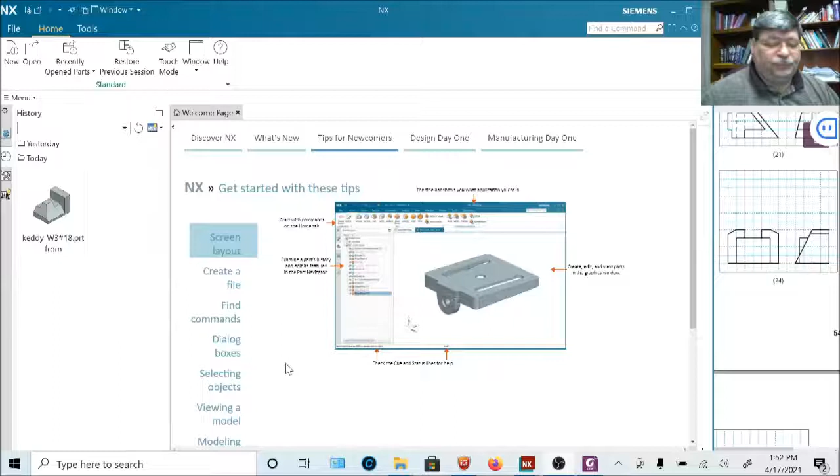Okay, week 3, homework problem number 2.

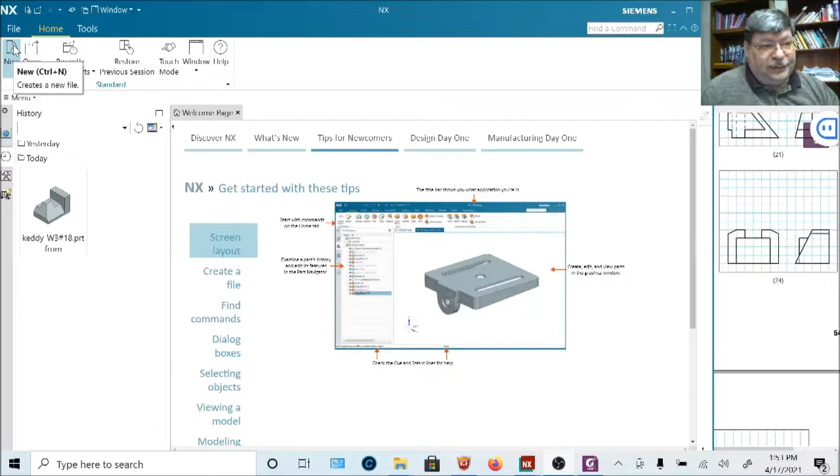Problem number 24. So we're going to go name it. Let's go week 3, number 24. And I'm going to put it under, again, make sure you put it on your U drive. Set this to your U drive.

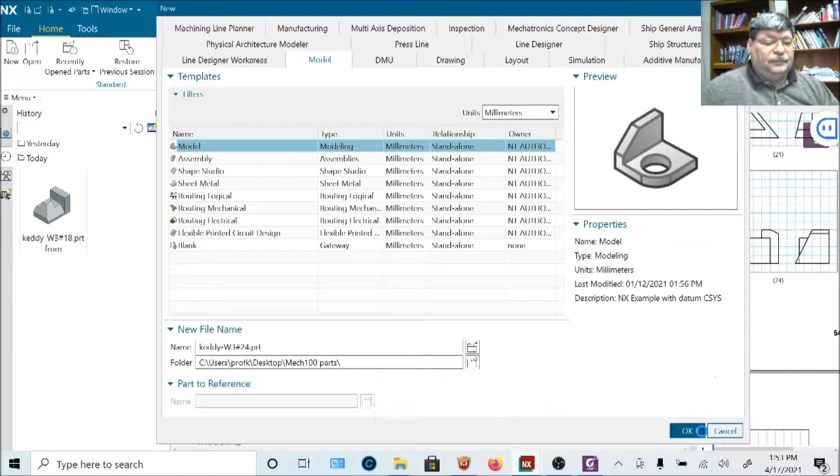Okay, you should have the screen up, and to the right here is the problem. If you're working from homework, you also have a top view if you did it right. You don't need it though, and if the top view is wrong, you certainly don't want to be drawing from that. Okay, you always want to attack this problem.

So think about it first. Look at the part, identify what it looks like. So we have this block. It's 40 wide by, what is that? 10, 20, 35 deep—okay, it doesn't quite come to the front surface here. And it's 40 high.

And then it has these two features. You see this hockey stick here on the left and right side, and those are inclined planes. That's the inclined plane here. And it's all attached—it's all one homogeneous solid.

So what are we going to do first? I mean, we could start with just create a big block that's 60 by 40 high, and then just start cutting corners off it. We can chamfer these top corners off—that's easy enough. We could subtract this front here, and we could do a chamfer on the front here. So instead of doing a whole bunch of subtractions, if we can do chamfers, we want to do that.

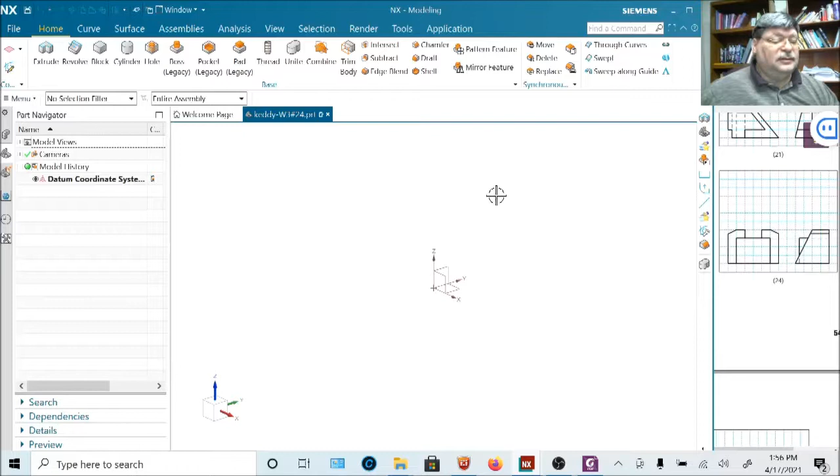So let's do from profile. We're gonna do extrude, we're gonna pick the profile datum plane, so we're on the right side. It rotates it, now we're looking from the right side. So here's my right side view.

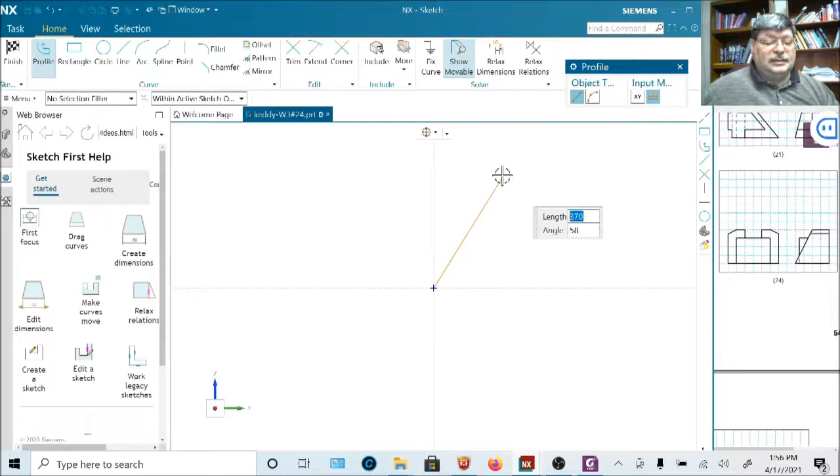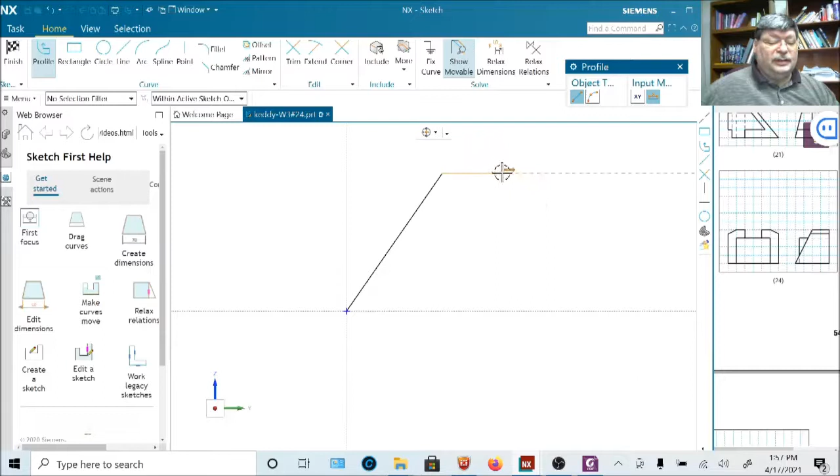I'm going to draw from the front of the object this incline. And let's see, that's going to be a little bit longer than 40 high. Let me zoom in. If I stop for a second, I can see what it's telling me—that's about 30. Okay, so I'm going to draw the first line and zoom in. There we go. And then this top will be about 20, and about 40 down and over there. And escape to get out of that sketching.

Now let's put our dimensions in. Okay, so start here, click to drop it. Double click, 40 deep. There we go, and escape to get out of that dimension. And this is 40. Enter. Up front, double click.

40. If it's highlighted up there, I can just type it in. There we go. And this is... oops, oh, I accidentally rotated it in space.

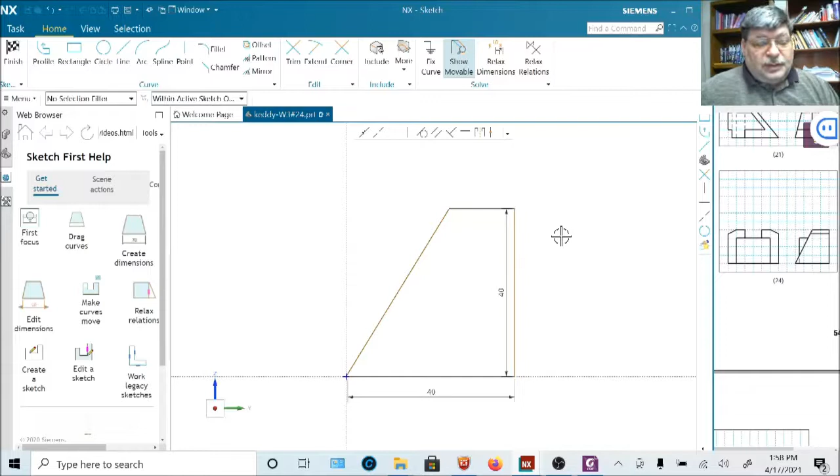Okay, Control 8, Control F8, Control F8. I thought that was supposed to— maybe it's Function F8. Just a second. Function F8. Nope, that's not doing it. Nope, that's bringing up something else. Control F8. Function F8—oh, there goes. Function F8 will bring it back square to the nearest plane that you're facing.

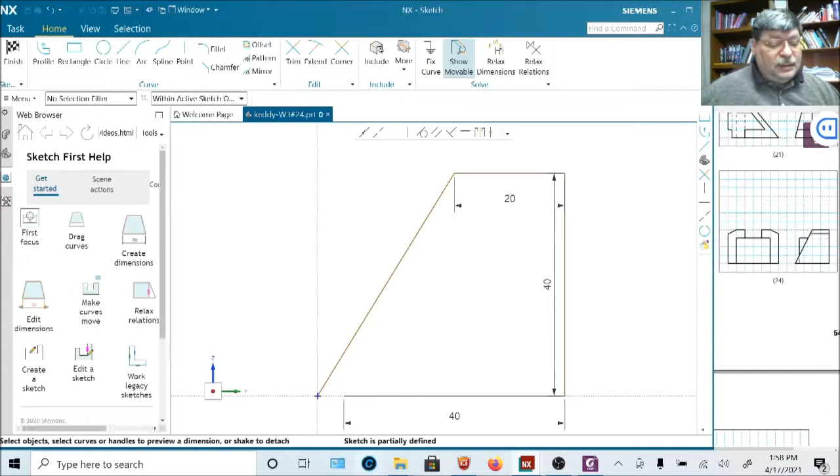Okay, click, double click, 20. And I have to resize my NX sheet again here in just a second. There we go—sketch is partially defined, so I don't have it all quite yet.

Oh, these are not connected. How am I going to connect those? Let's try coincident point—click on this and click on that. Did it bring them together? I believe so, let's say okay. Nope, it did not—nope, it was just a pause, it was thinking. Okay, now it says sketch is fully defined.

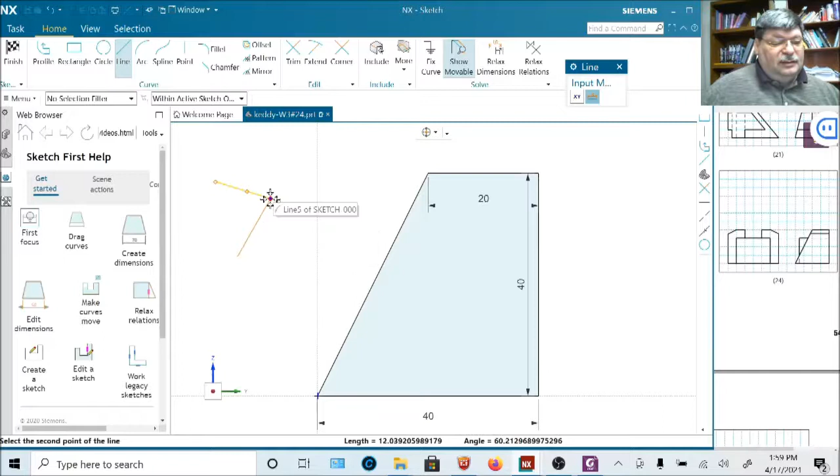Okay, so I missed the endpoint when I came back and I didn't quite click on that endpoint. You got to watch your cursor and watch what's happening to lines. Let me give you an example again: a line here, a line here. I'm going to go to that endpoint, make sure it makes a little red dot there on the end, okay? And not there where it misses it, or here. Okay, so you got to make sure you're on there when you snap.

And let's back that up. Okay, so this is done. Let's finish it.

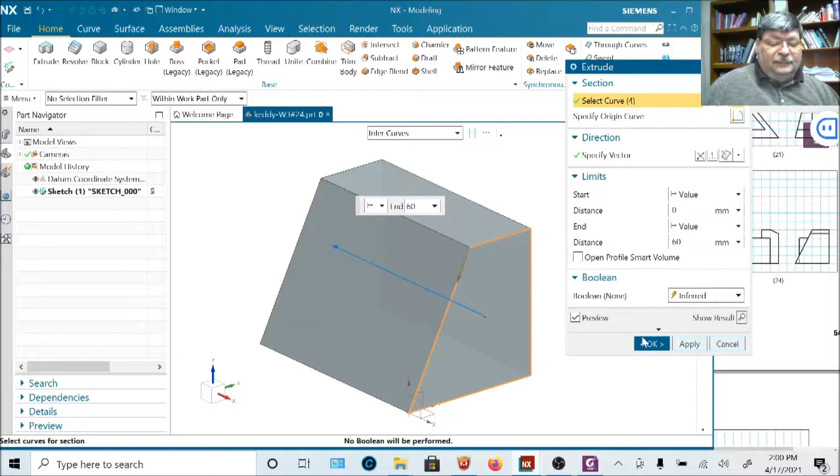Let's zoom in, rollerball. And from that plane, we're going to go to the left, 60. Pan it—mouse button 2 and 3, hold them down for panning. And say OK. Now that's good so far.

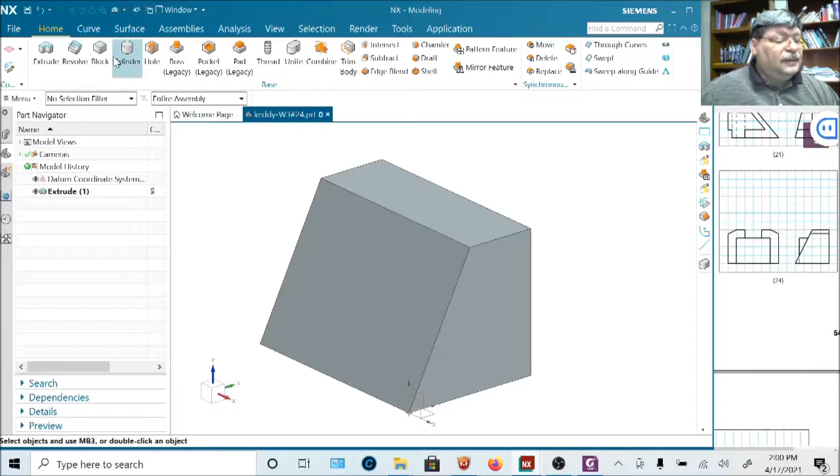We've got to cut this hole through the front, right? We already have the incline cut though. We've got to make this box. Okay, we can do it. Let's do it from the frontal face—let's do the box. Now I'm on the front face, and the box doesn't start until 5 units, 5 millimeters in, but that's okay.

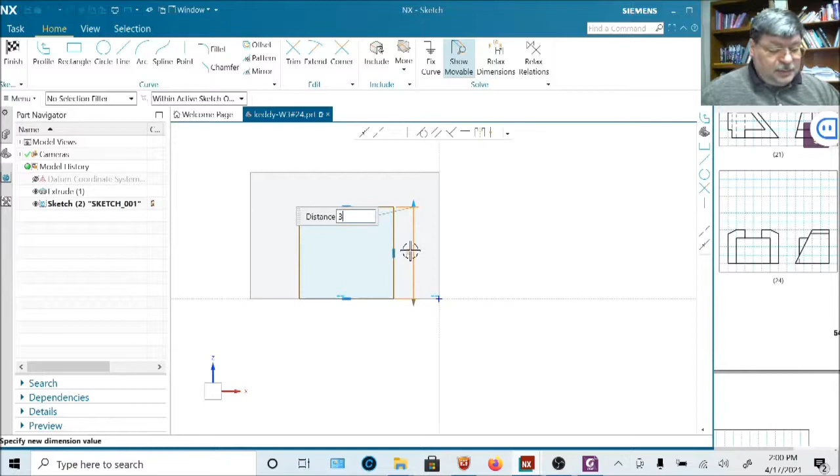Click, drag. Okay, this one is 30. I'm getting used to this new

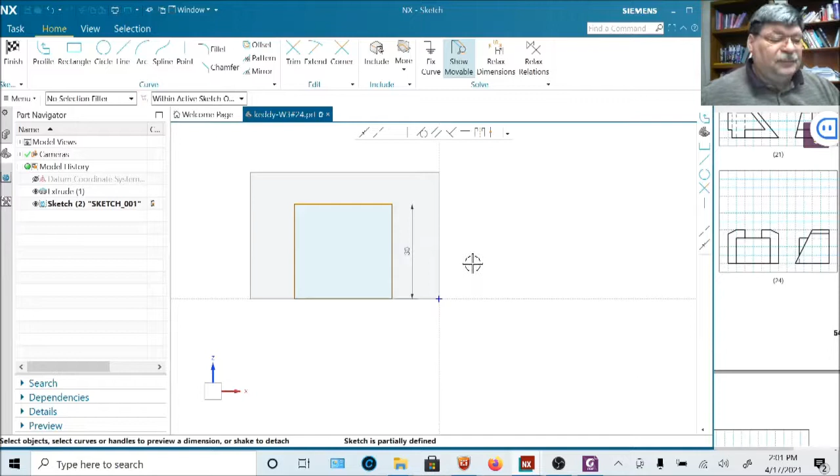Version 13, as I call it. This is actually, what do they call it? They call it a build now. They went from version 11 to 12, but nobody likes to do a version 13, okay? Like they don't build the 13th floor on a high rise. They go from 12 to 14. I don't know what they do with 13. People are superstitious—nobody would rent a 13th floor, okay? So that's why they don't number it 13.

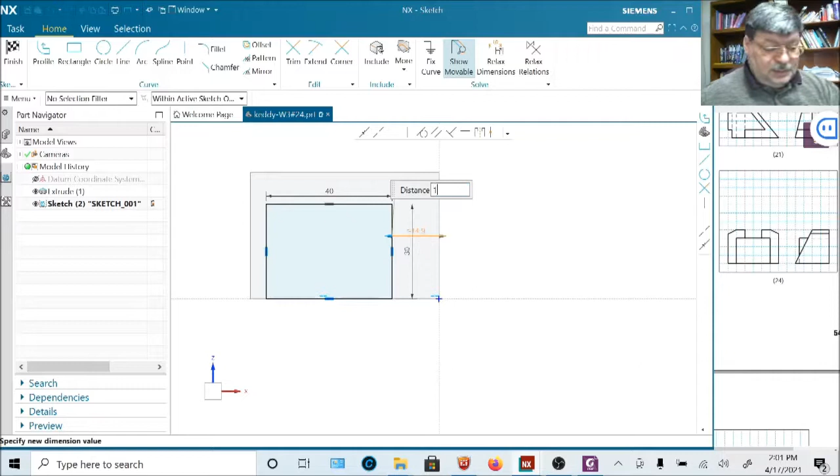Okay, this is 40 units wide, I believe. Yep, and then we just have to measure from the right side, and it's 10 units in from the right side. And that says fully defined. Good, great. Finish it. Now, this is the positive direction, this is the negative direction. Okay, we're going to start from 5 millimeters.

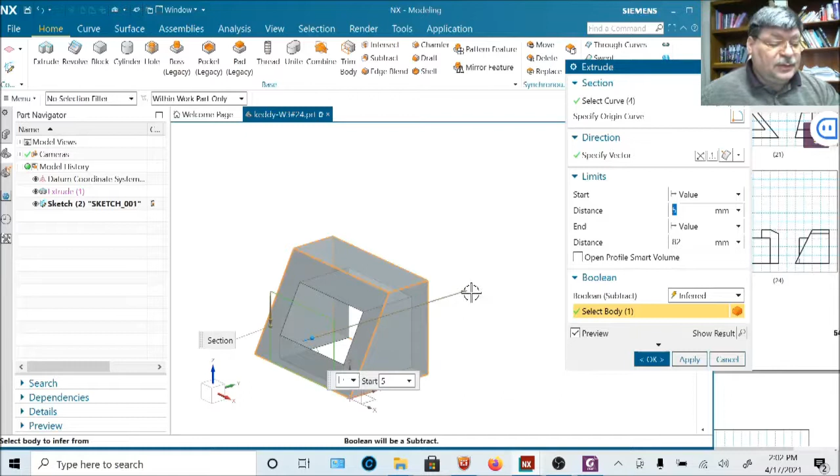And you know what? Okay, we're going to use this twice, I guess. We're going to use the same sketch twice. This is how we're going to do it. We're going to go from here outward, and we're going to subtract it. And apply it.

And then, how do we get that sketch back? I'm going to cancel that. I'm going to right-click on extrude and say, not edit sketch—how do I say, used to be a way to say 'make sketch external.' There we go, so I can see it.

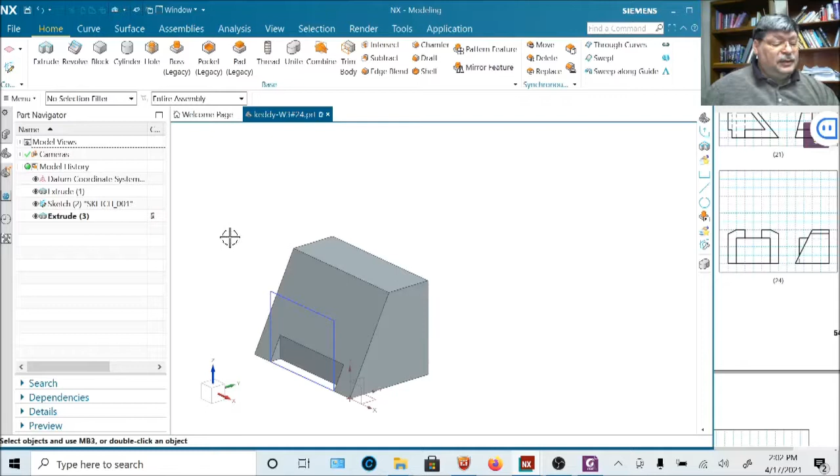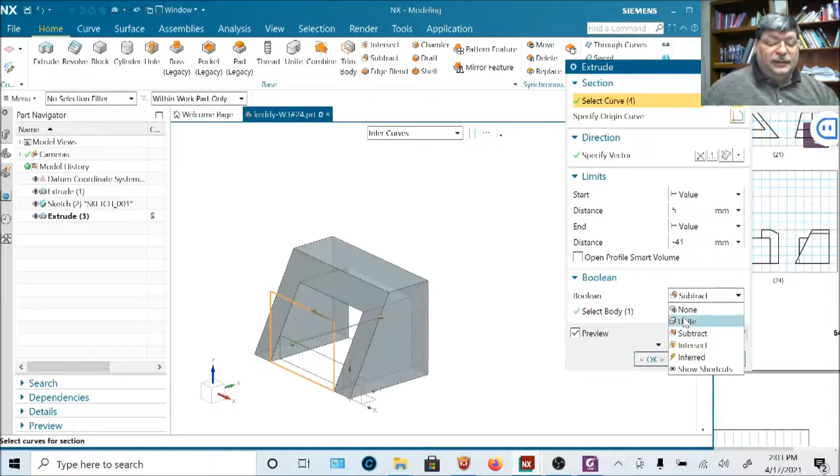Okay, now we're going to extrude from this, highlight the sketch, start from 5 millimeters in, and go to 40 millimeters in, and not subtract, but unite. Okay, we've got to go from -5, -5, to -41. Makes sense? And unite it so it doesn't just do a block inside of a block.

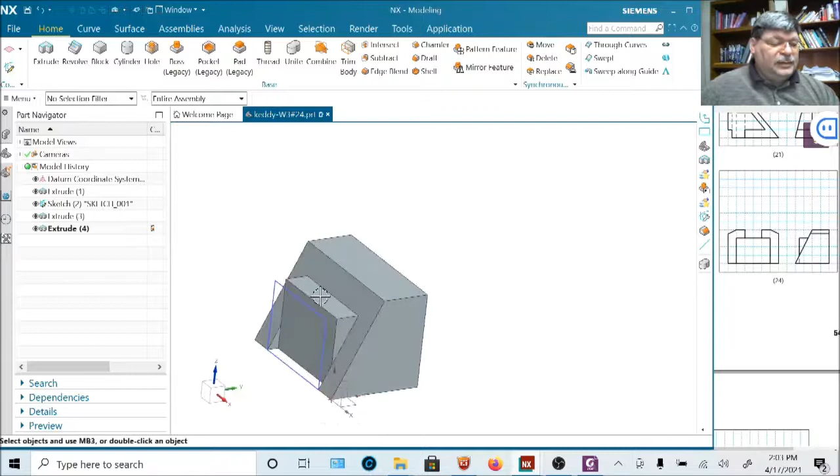If you don't unite, oops, I went a little bit too far. Did you catch me on that? Right-click, edit parameters, 41. That's when you're stretching it, pulling it—something you've got to be careful with. Because it should go right through to the outside. There we go. If you don't unite it, you're going to see that square box on the back.

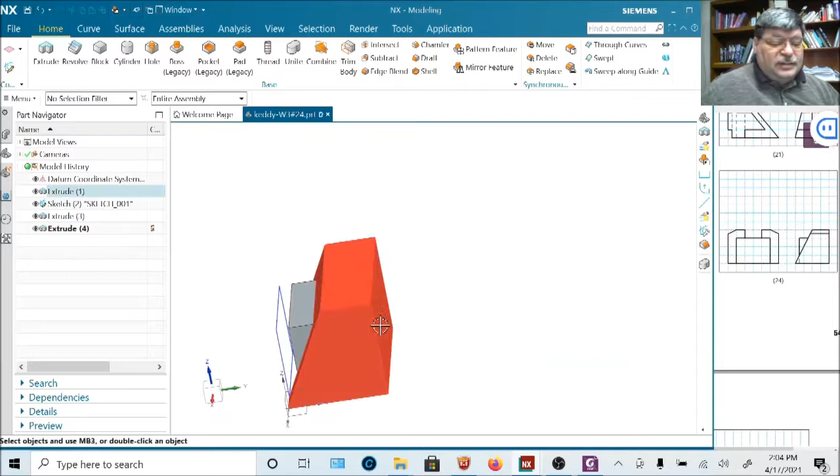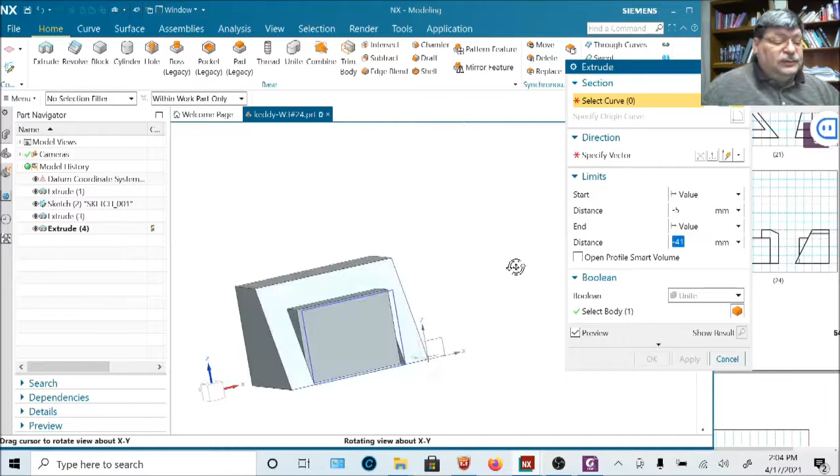Good enough. Extrude. We can use the front face this time. We could cut this top from the top down, from the front down. We could even cut it from the right side if you wanted to—we would just start in from 10, from 20 in to 40 in. So sometimes you can cut the same hole from 3 different directions, sometimes from only 2, sometimes a feature can only be created from one of the 3 dimensions.

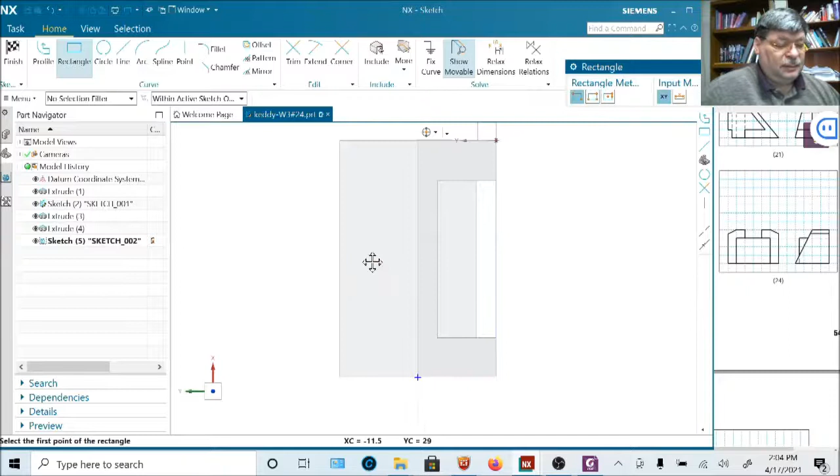I think I'm just going to go from the top down. And I'll put a—why isn't it giving me a rectangle here? There we go, so draw it. Where's it at?

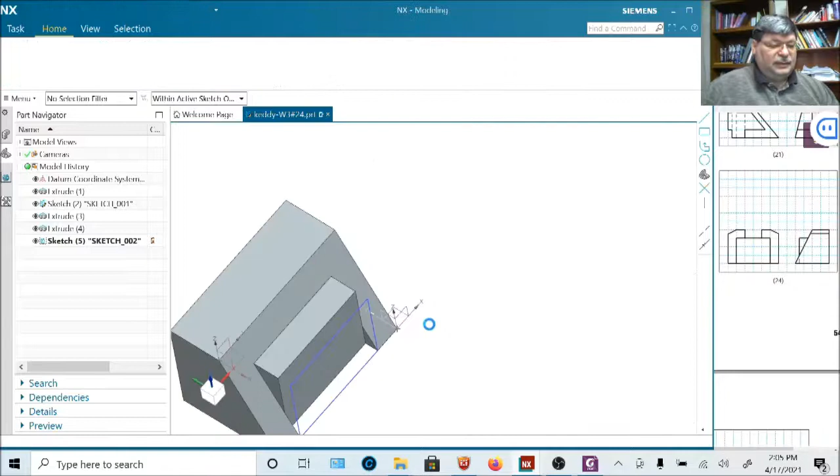I don't know if my computer's messing up or the program, or I'm going to finish this and come back in. Okay, let's try it again.

Let's start from home. Okay, we're going to go—let's go from the front face. Extrude from a vertical front face. Here we go, rectangle.

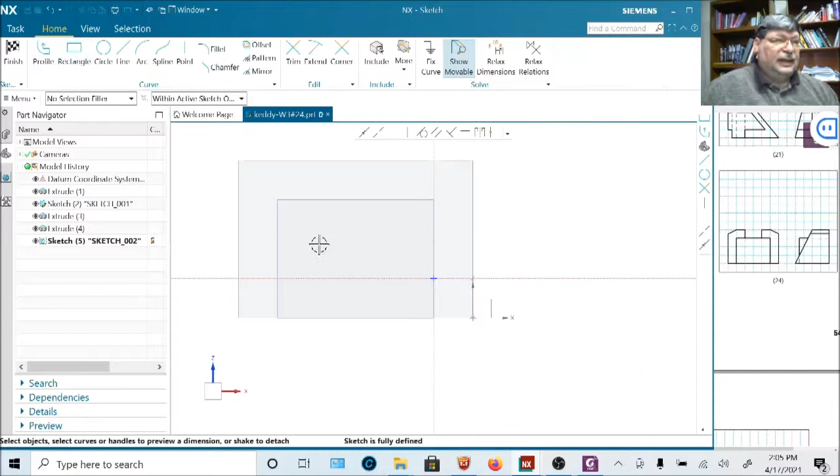Why is it not drawing anything? Oh, I'm clicking and holding and dragging—okay, that must have been how I used to do it. You click, rectangle, click. Oh, you've got to get on the right one. Okay, here we go, you click and let up. Okay, I don't know why I was holding it down, whether I'm thinking AutoCAD or something else.

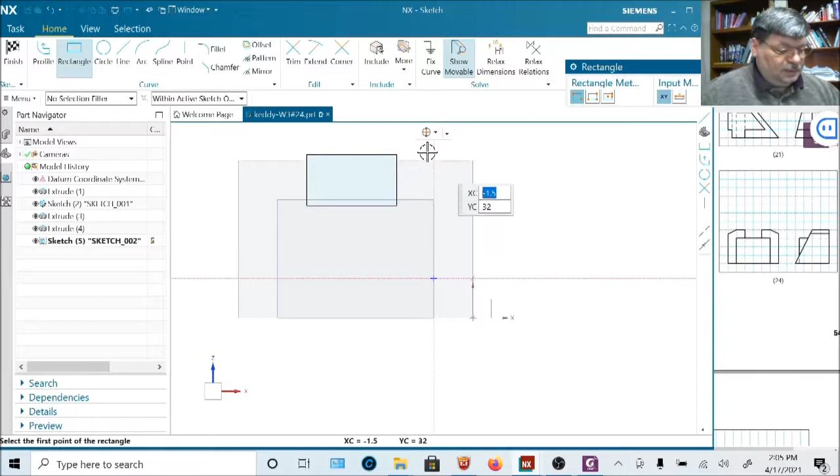Okay, let's see—from here to this line would be 10.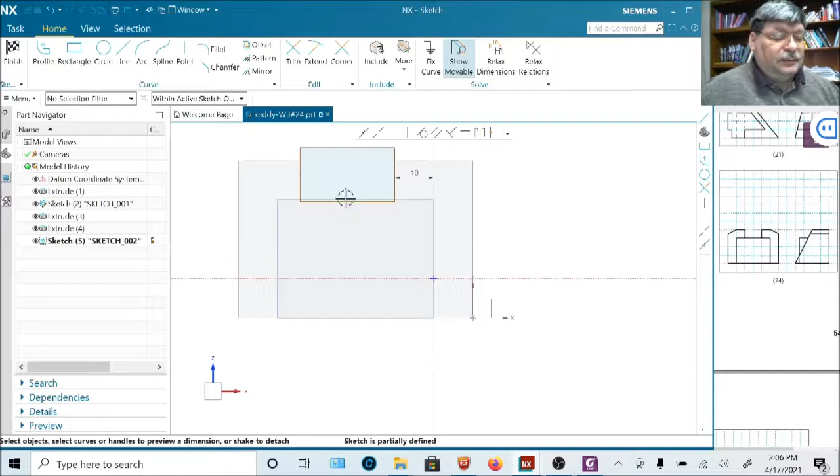Yep, 10. Enter. Don't forget to hit enter. From here down to the world. Why is that thing there? I don't know what that distance is. Why did it put that line? Why didn't it put it on the vector? Can I draw from the vector? That's the important thing. Can I go from here?

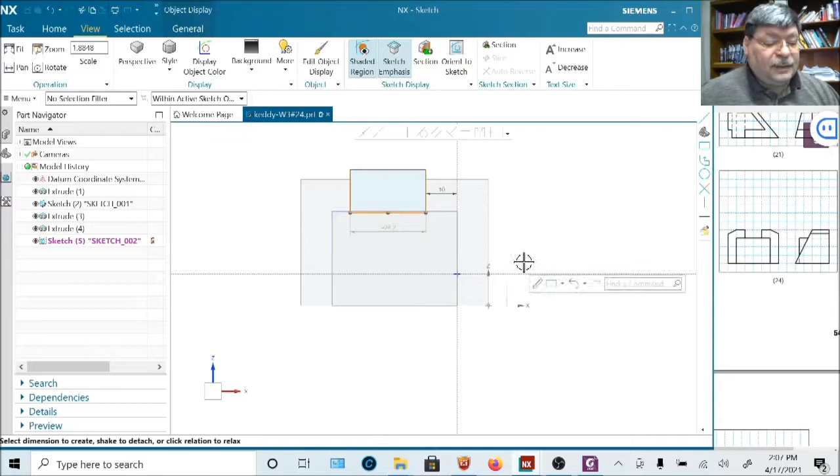When they give you the option to make a symmetrical part, like a circle in the center there, they always give you these symmetrical lines here. I want to go, though, from this line. You used to be able to pick a vector. Why isn't it letting me pick a vector? But it's not. Okay, I'm going to get out of this. No, I can't even get out. Oh, home, finish. Here we go. Maybe that's why. Maybe I was in the wrong one.

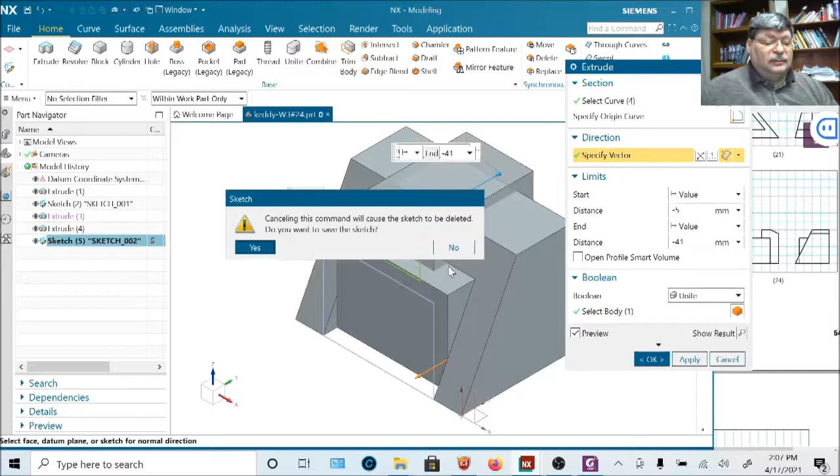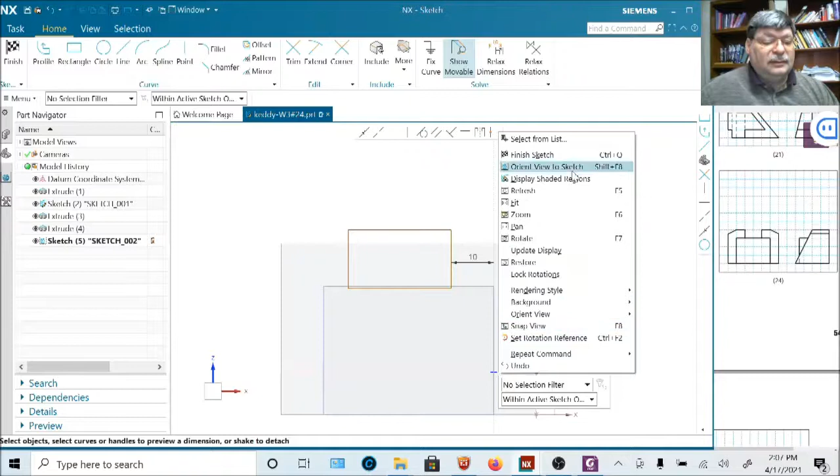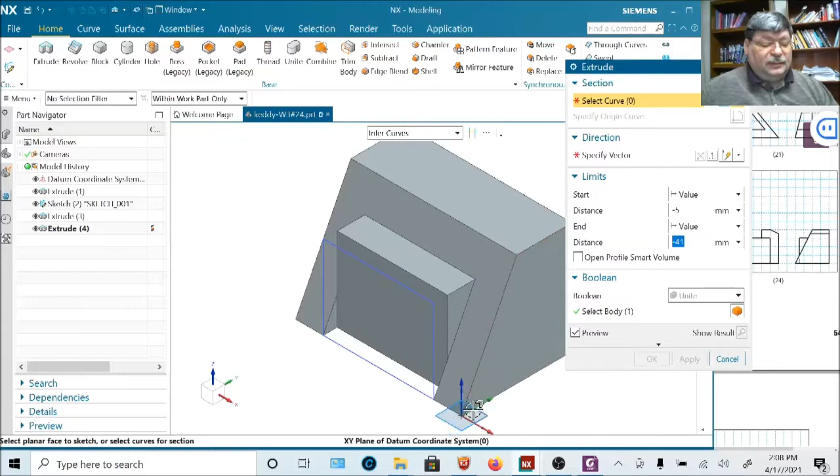I tell you, I've got a learning curve here too. New version, so that's, oh, I already have that dimension. Let's see if I can go back in there. Why did it? Is it right click? I don't know. I'm just going to have to delete and start over. Let's do an extrude from this datum plane, the frontal datum plane. Boom. Okay, my line's in the right spot now. I'm sure there's a workaround on that, but sometimes it's best just not to fight things.

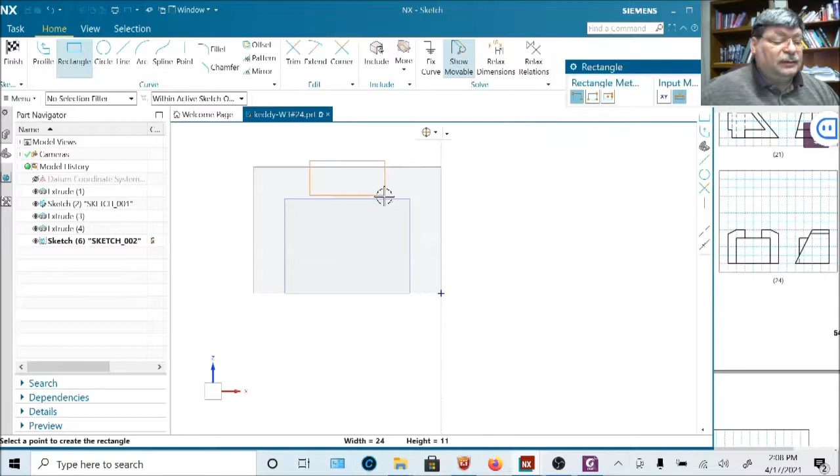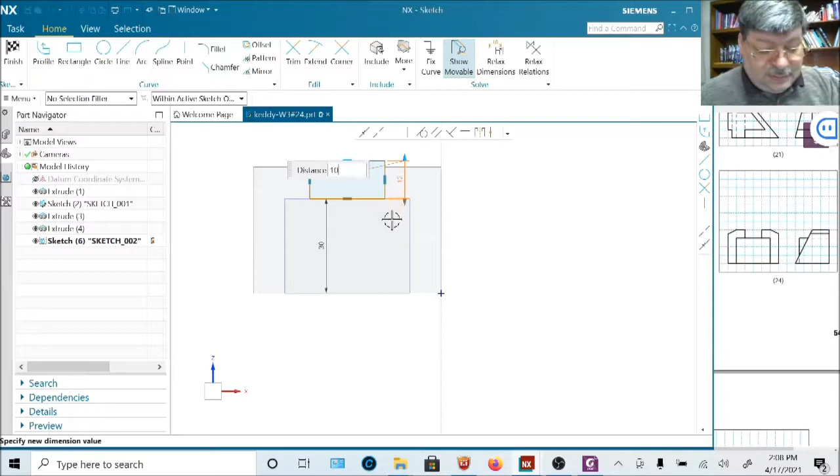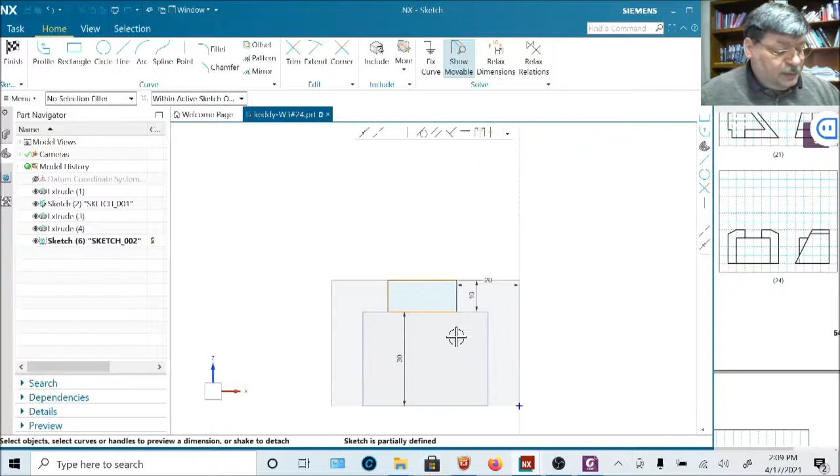Okay, so let's draw my rectangle. Click, 2-point rectangle. There we go. Here to here is 30. And even though it looks 30 already, let's make sure we constrain it to 30. And then the height, although we could be oversized and this wouldn't hurt, let's make it precise. And then from here to here is 20. I should zoom in so you can see what I'm doing. And that's partially constrained. Why is it partially constrained? Well, let's see if we can move it.

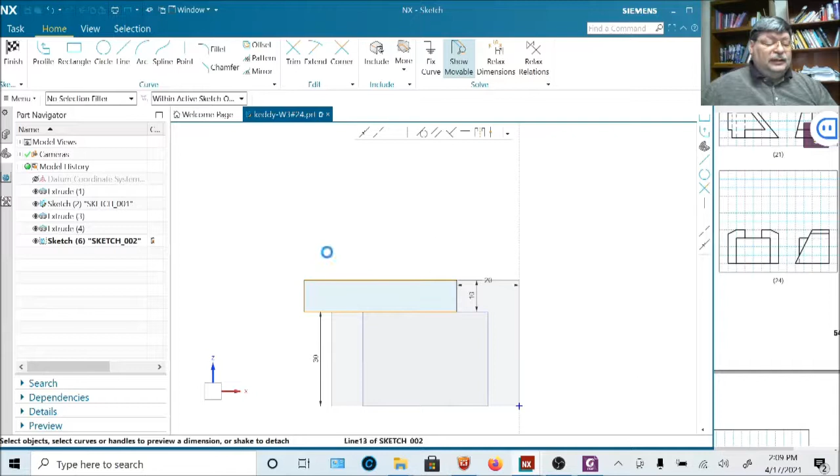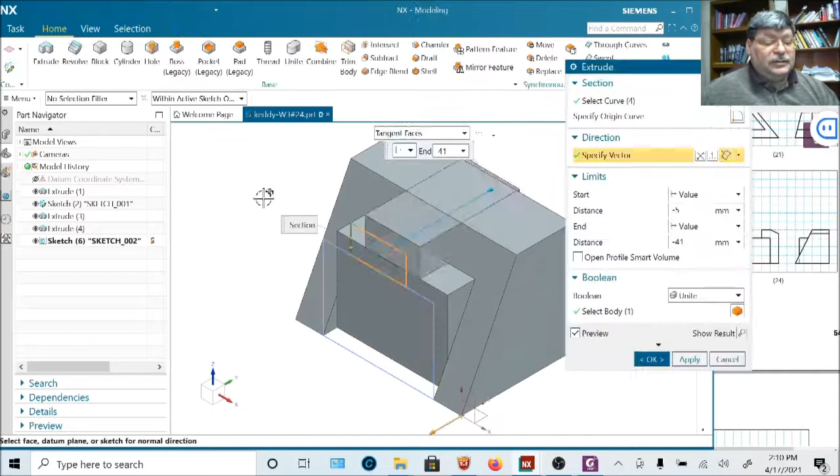Why does it say partially constrained? Because I should have it constrained. Oh, I don't have the length of that thing constrained. Okay. Yeah, try moving a line, try stretching a line. That's how you find out what's not constrained. Double click. This is 40. Not 40, 20. There we go. 20. Good. And now escape out of there. Sketch is fully constrained. Finish it. Extrude it all the way through. And subtract it. Hit OK. There's no line across there.

If there was a line that appeared across here, that means there's a little shelf or something, and I didn't get it exactly right. With CAD, you have to create it exactly perfect. Now, you might ask, why does it have to be exactly perfect? What if your point is 1 millimeter off? Well, if you have a part and you then dimension it, the thing is, it's all in CAD. It's all precise to like 8 decimal places.

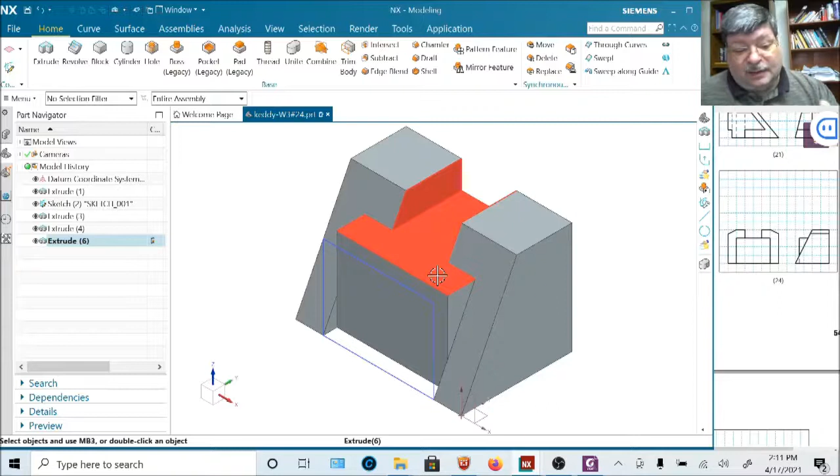A lot of times the data information of a part like this is dumped to a machine, not to a person that's going to cut it out of a block of wood or a piece of steel. It's actually going to be dumped to a CNC machine or a 3D printer. So whatever the tolerance is on that machine, it's going to build exactly what the model tells it to. So you have to be precise. You can't just be close and then put the right dimension on it in a drawing, because it may be actually made from the solid modeling program.

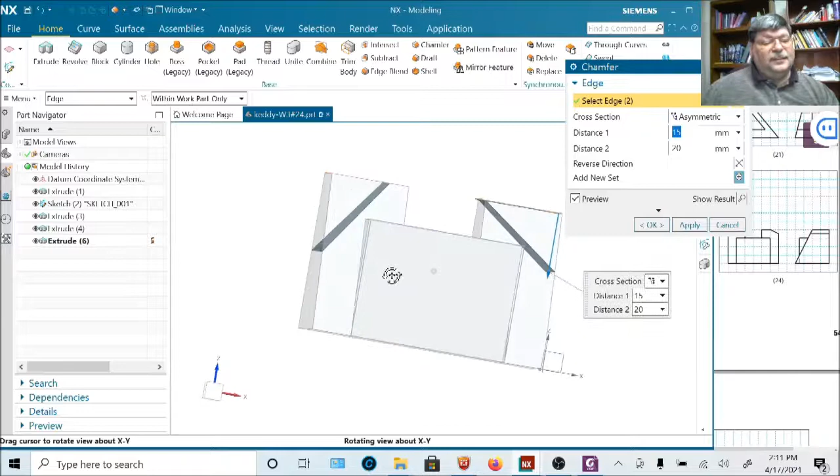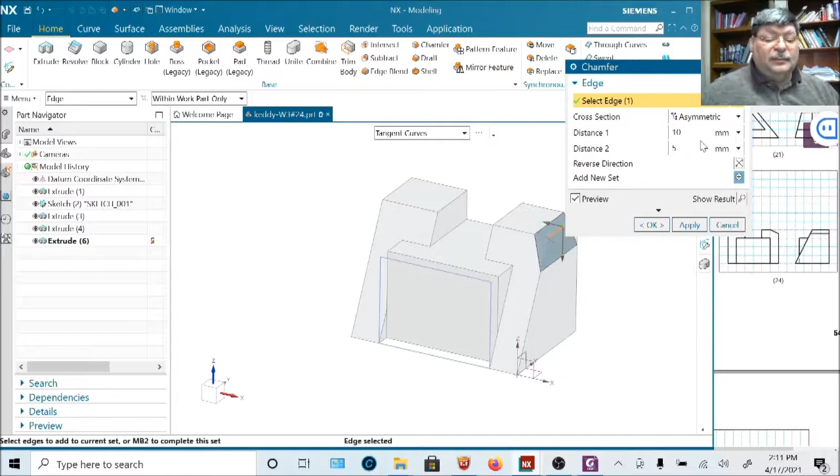Okay, so what we're going to do is chamfer on here. Where's chamfer again? Up here. We're going to pick this side. Sometimes you can pick both sides, but if it's asymmetric, no, it's not letting me do that. So I'm going to back it up, escape out of there. Chamfer just one side at a time. Asymmetric, and that side is 10 by 5. So one of these is 10, tab, and one's 5, tab. That look right? Nope. So reverse it. Apply it. Click on this. That looks okay.

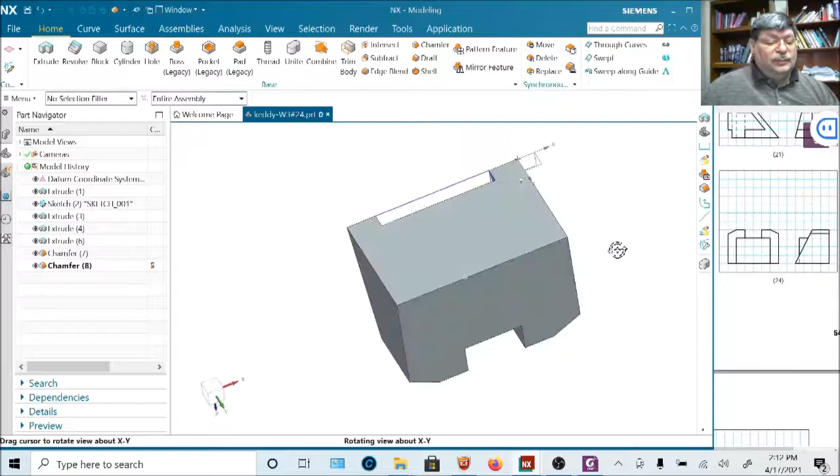Oops, I missed it. There we go. Okay. Look right? Spin it around. Make sure there are no lines or edges that shouldn't be there. Hit isometric. Now if you want to hide that blue line there, you can just click on this little eyeball here. That's the hide feature. Or you can right click, I think, and say hide also. Okay, and save it.

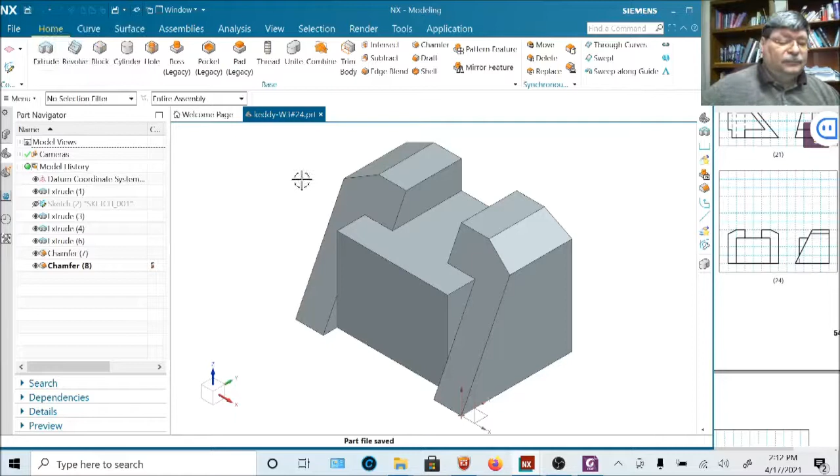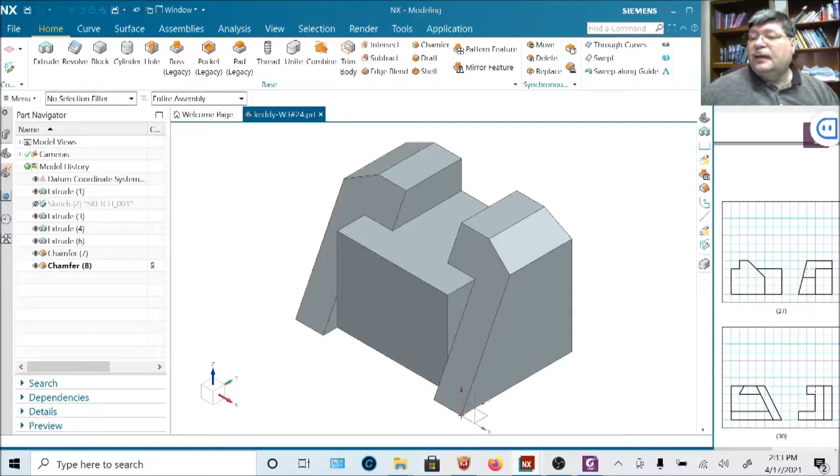Okay. The next one up is this one, number 27. And this one, I'm actually going to model it on its side intentionally, because I've noticed in the past people will do these a little bit incorrectly. I'm trying to keep these videos short though, so we're going to stop right here and pick up with the next one on the next video.